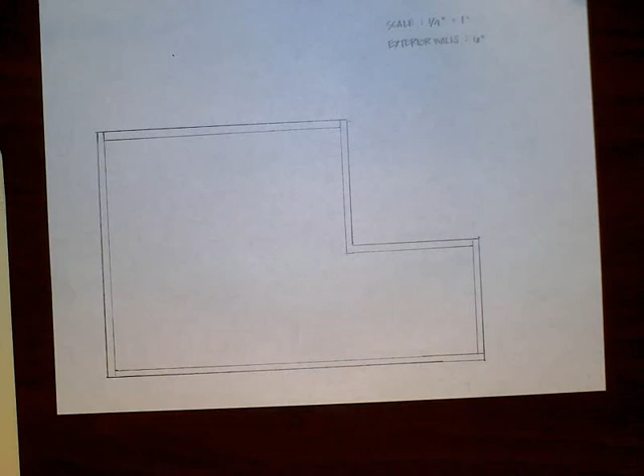Lastly, we do want to dimension our lines. So a dimension line, remember, looks like this. I'm going to draw it, and just so you watch real quick, the dimension lines do go slightly above. We're going to dimension our drawing.

So let's go ahead and put our dimension lines, using the 1/4, a foot away. Actually, let's put it 2 feet away from the outside wall. So let's go ahead and mark 2. So I'm going to do the edge, 2, and I go 1 foot, 0 feet.

So this is a 2 foot distance. We're going to do a 2 foot distance. We're just going to draw a light line right here. We're going to use these as our dimension lines. I'm still lining it up no matter what line I draw. It needs to be precise. I'm going to kind of carry them up. I'm kind of doing these a little bit lighter.

Okay, so it's kind of like a dimension line. I'm going to overlap them to where it has that little overlapped effect. And then add a little cross slash. And then this dimension, like we had said at the beginning, was 20 feet. So it's going to be 0 to 20 feet.

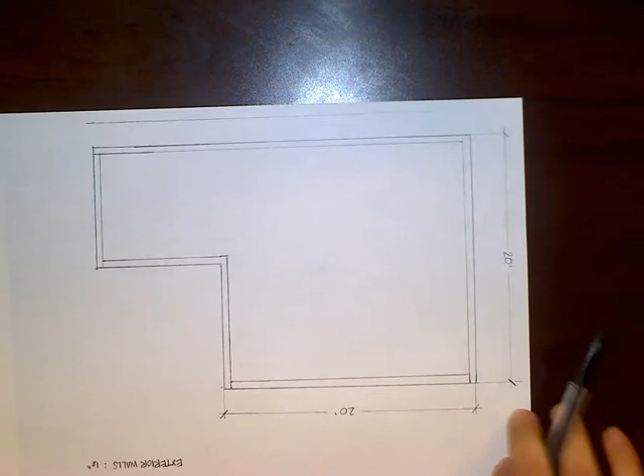Okay, now let's do this one down here. It has to be about 2 feet away on our 1/4 inch scale. Remember, this is the long one. Your triangle might be longer than mine, so I was just thinking about that. I think I have a shorter triangle when I use this fluorescent one. Still lining up at the edge of the paper. Overlap them. Overlap them. Do that little tick mark thing or the slash.

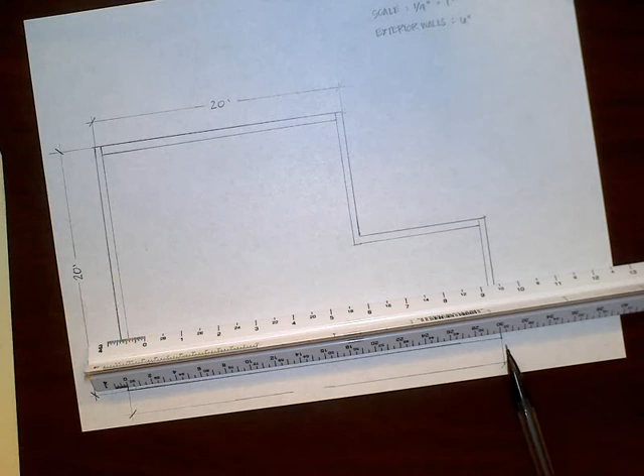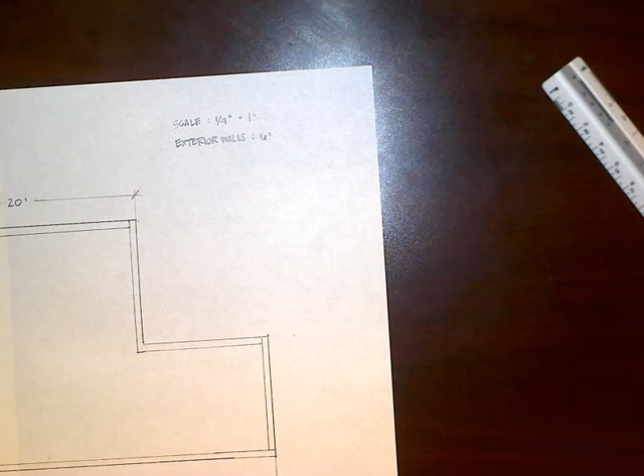And this dimension was 30 feet. So we could verify that again. 0 on our 1/4 inch scale to 30 feet. And lastly, oh wait, no, we still have 3 more to go, not lastly. Okay, 2 feet away for a dimension line. Lining it up with the edge of the paper.

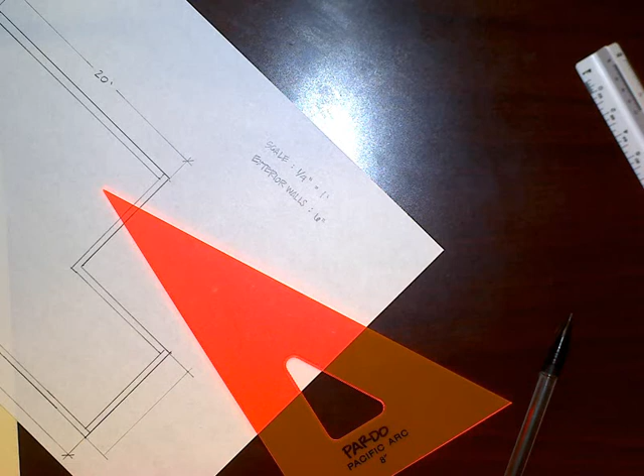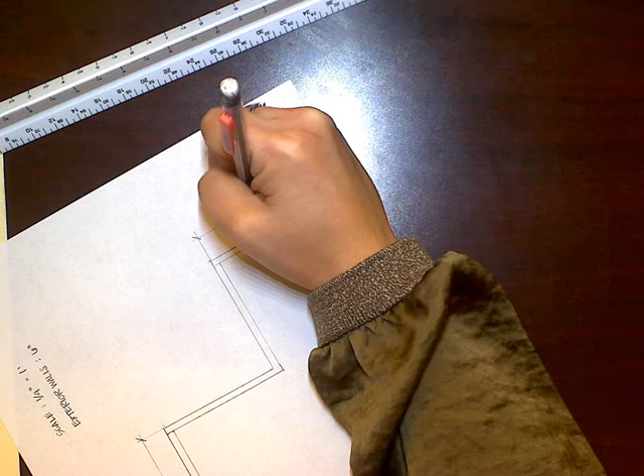Getting the width of this little part of the building, bringing the lines out. Making sure the overlaps are there. Do the little slashes. And let's remember that this one is 10 feet, 0 to 10 on our 1/4 inch scale. Okay, 2 more to go. And let's mark it. This is 2 feet.

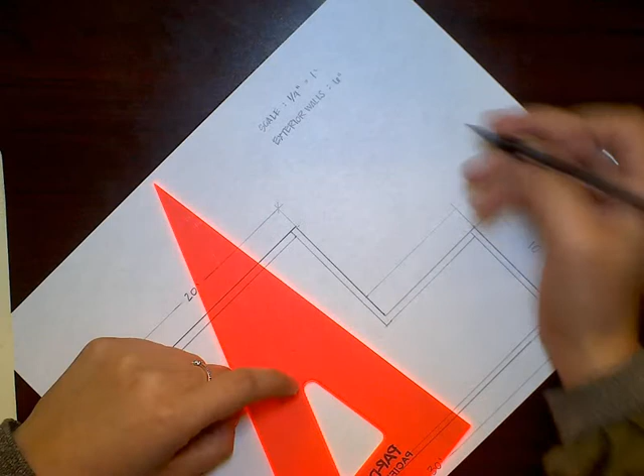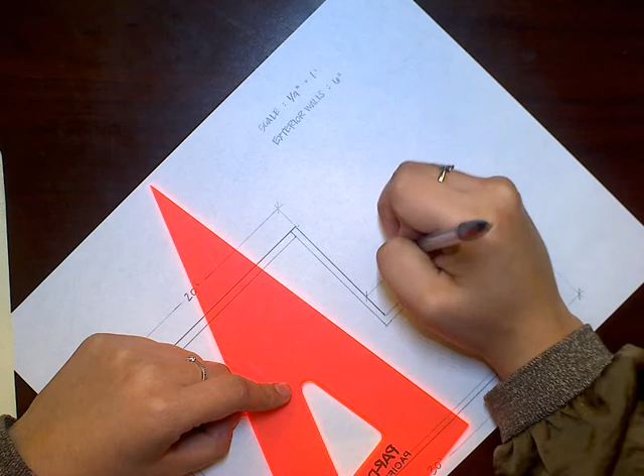Overlap it. Okay. Now this one right here, we don't really have to make a line, but this is where the slashes are important because this one obviously overlaps and our slash would kind of just go in that intersection where both these lines meet, the corner of the house and the dimension line. So that's why the slashes are important, because you can view it better, that it's from that point to that point, that it's 10 feet. Let's go ahead and verify that it's 10 feet. Remember, we're verifying from 0, the exterior, to 10 on our 1/4 inch scale.

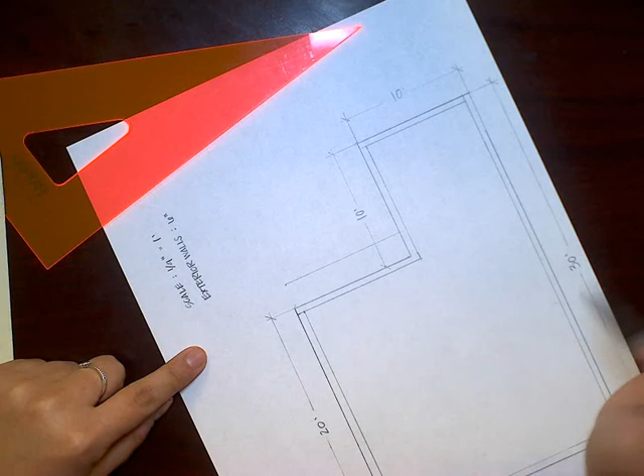Now our last one, we want to make sure it's about 2 feet off. Line it up with the edge of the paper. And now this one you take all the way over, because we are getting this dimension to this corner out here of the house. So it's going to overlap with that dimension line. Okay, make sure they overlap. And do a little slash here.

And now this one is going to be over here where the edge of the house and the dimension line meet. And now we're going to make a little spot for it in the center, and we know this is 10 feet, but we could always verify by measuring. Remember, it's from the exterior point 10 feet. And that's it. That's what you should be left with. There you go.